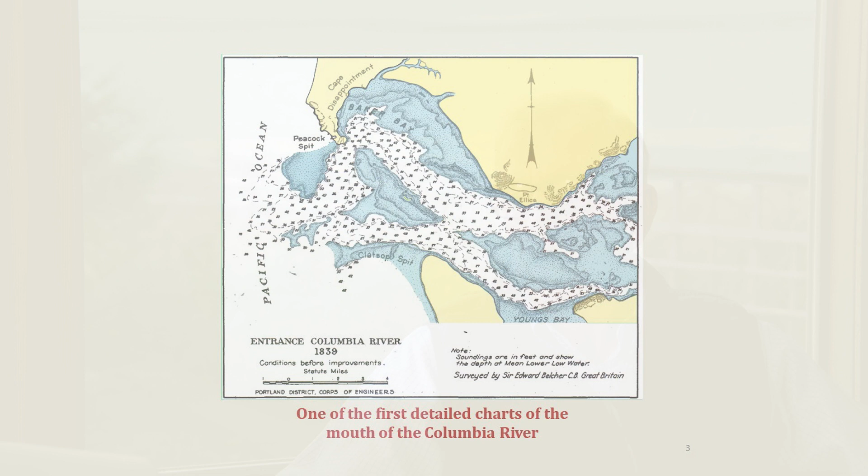The presentation is called Rails in the Surf, and it's reshaping the mouth of the Columbia River, and it's the story of a world-class engineering project. At the time of the discovery of the Columbia River, and for many, many eons before that, the mouth of the river was about 6 miles wide from what we now call Point Adams on the south to Cape Disappointment on the north. It remained that way until 1885, when the Corps of Engineers began the process of building the jetty. The first detailed charts of the mouth of the river were done in about 1840 by the Wilkes expedition.

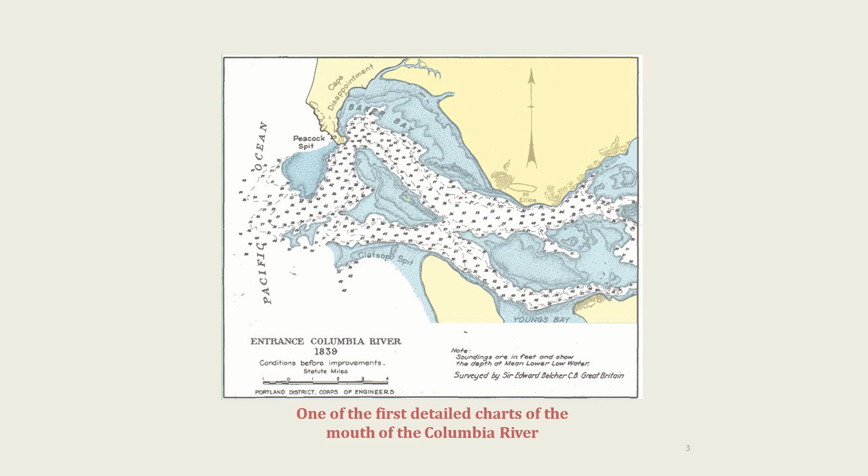And there were 2 channels in, a south channel and a north channel, and they were split by what was called the Middle Sands. So what drove the need for the jetties? Between 1850 and 1940, the population grew from less than probably 20,000 people to almost 3.5 million, and that's Washington, Oregon, and Idaho. California population added to that takes it up almost to 10 million people in that same period. There was lumbering, wheat production, farm products, and all of that was being generated here. Some consumed here, but most of it was being shipped elsewhere, primarily to California, but also to the East Coast.

So the merchants in the area began prevailing on the Corps of Engineers to improve the mouth of the river because the passage over the existing bar was very dangerous. And sometimes the ships would have to wait offshore for a couple of weeks to be able to get a break in the weather to make the passage, and outbound the same thing. They sometimes waited here for a month for good weather to be able to get the ships out safely. As the area was growing, also the production was growing inland, so the pressure was just continuing to grow.

And then in the 1930s there was a series of projects. There was the construction of the Sand Island pile dikes and the reinforcing projects of both the North and the South Jetty, which by this time had been exposed to about 20 or 30 years of hard weathering, and they needed reinforcement. And then in 1938, they started the Jetty A project, and that completed the jetty system as it exists today. And then it was primarily the maintenance of the jetties plus the maintenance of the channels at a consistent navigational depth. In addition to the jetty projects, the Corps of Engineers improved or built new defensive forts at Fort Canby on the north side of the river, Fort Stevens on the south side of the river, and then Fort Columbia also on the Washington side.

At the time the jetty was being built, the problem was that the South Channel, which came around Point Adams, [crossed a tide] flat that was exposed at low tide, and generally the prevailing winds are from the south here, and so a ship inbound would have to come in and basically make a large U-turn to get around Point Adams upriver. In the North Channel, there was a narrower channel, and you had to go around the middle sands, which were right in the middle of the river.

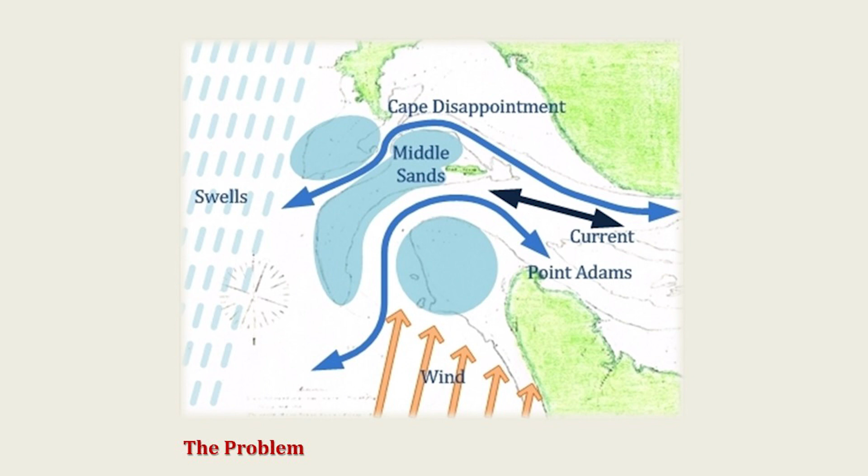Then you had the swells that were coming in from offshore, and so it just made for difficult navigation, and so a lot of ships were damaged or lost, and those that made it out often did so with loss of some freight or some damage.

So the solution was to build the jetty, and the Corps of Engineers, which was the U.S. Engineers at the time, it really preceded what is now the U.S. Corps of Engineers, looked at ways to do this, and they first thought they would construct a large pile jetty by just simply driving piles in, and they were thinking about building about 8,000 or 10,000 feet of piles along the course of the river to try to train the current to wash the solids out that were coming down from upstream.

And they concluded that trying to use a pile driver on a raft that was going up and down in the swells and the current was not a good solution, and so they chose the narrow gauge railroad, which they'd used on other projects all over the country, as the means to build this jetty. So that was the beginning.

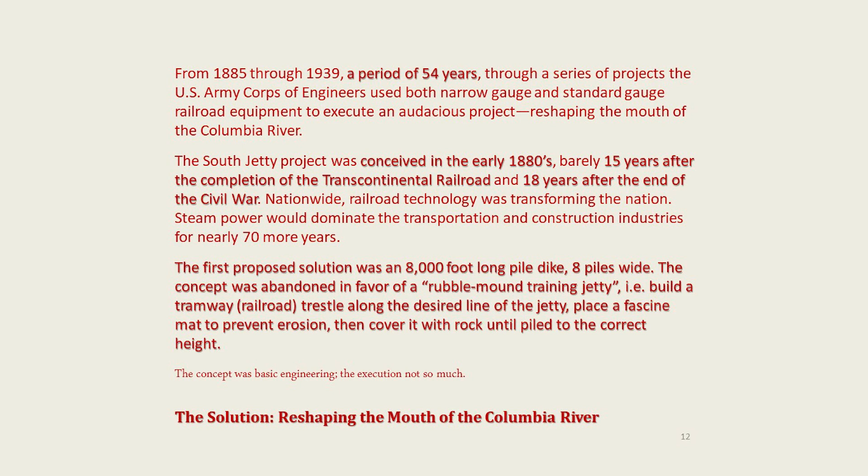Our tendency is to rely on what we can visually observe, and the jetties that we see there today are what we see. They're visual manifestations of engineering and construction that took place 120 or 130 years ago. And the part that's not visible is that the effort that was put into building the jetties was also there to shape the base of the river, which would always be below the current.

And so they were also looking at the bathymetry of the river. There's a series of maps starting in 1792 that run to about 1950 that show the changes in the river. Along with the river changes, there was also a change in the landform.

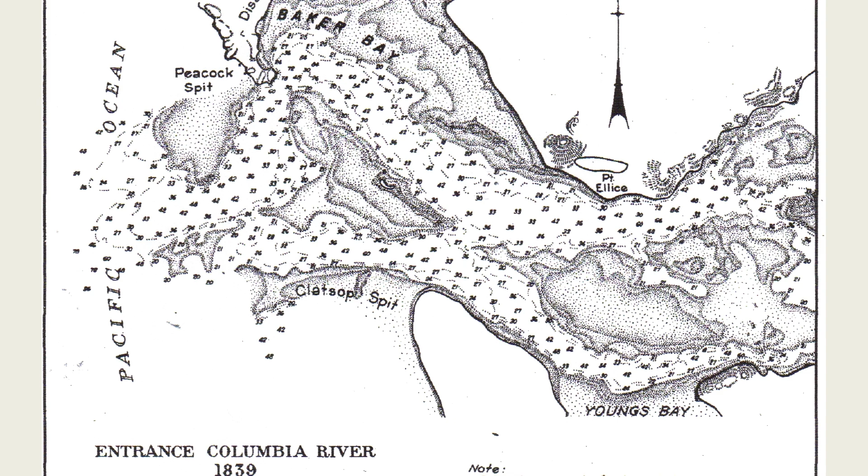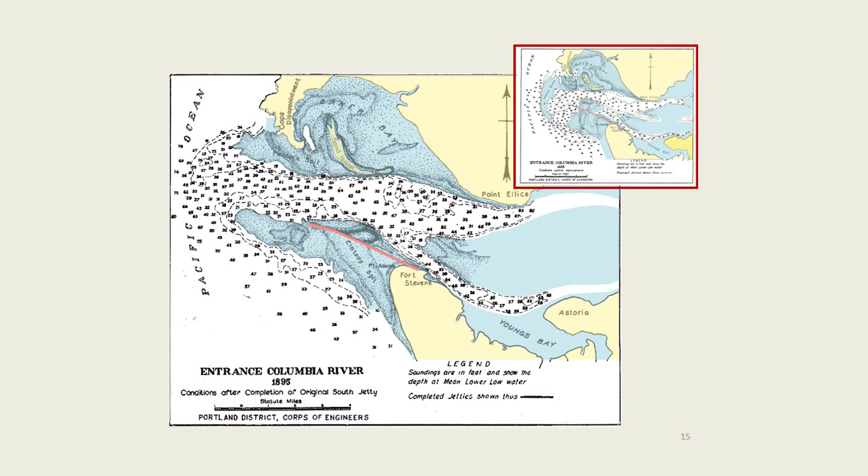And in 1885, before the construction of the dikes, we had the middle sands in the river, and we had the two channels, and Point Adams was just a round spit of land going out into the river and dying out, and you had Cape Disappointment on the north, sitting on the lava flows that were there. And once they started the construction of the jetties, by 1895, Clatsop Spit was beginning to form around the jetty, and land was accreting there.

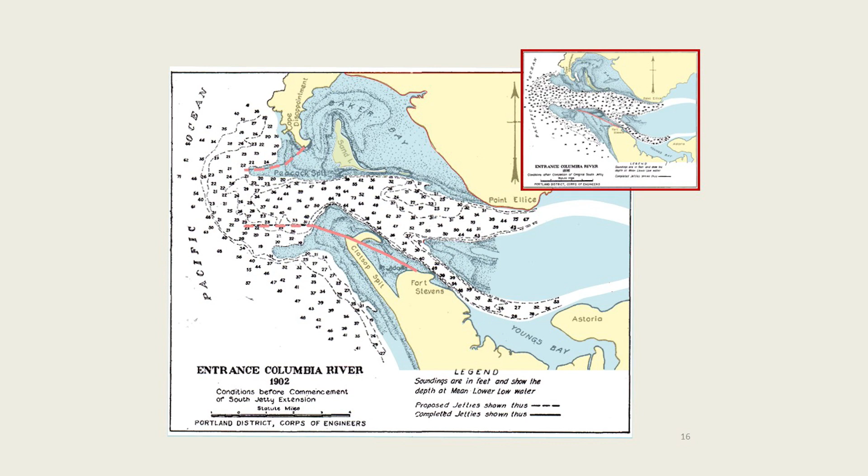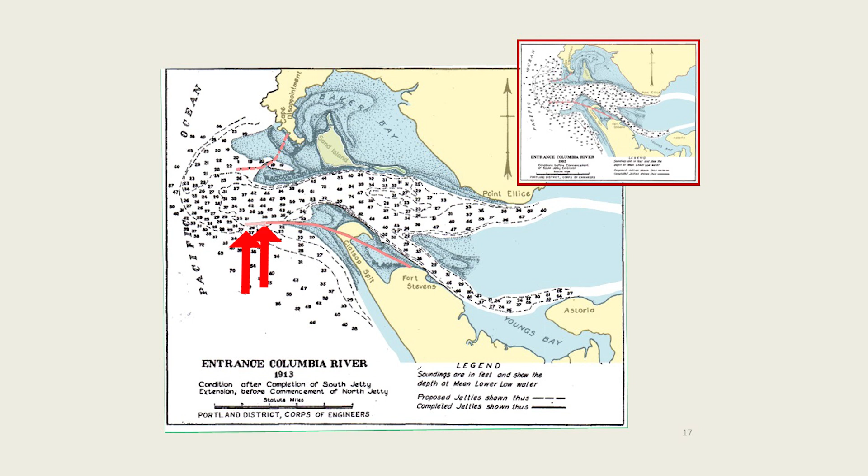By 1902, the land had accreted on the ocean side of the jetty and filled in a significant portion of that tide flat that the jetty was built on. And Clatsop Spit was emerging on the south side of the jetty. By 1913, this was well established. The jetty extended out into the river to where it currently is today, although now there's a gap between that end of the jetty and where the jetty that's being maintained ends.

Then in 1914 through 1917, the Corps constructed the North Jetty. By the time that was completed, the Benson Beach area on the north side of the North Jetty had begun to accrete and fill in, and the Long Beach Peninsula also underwent about 1,000 feet of accretion of new ground, basically because of the redefined channel and the way that distributed the water and the sediments out into the ocean. And the beach south of the South Jetty also accreted a significant amount of land.

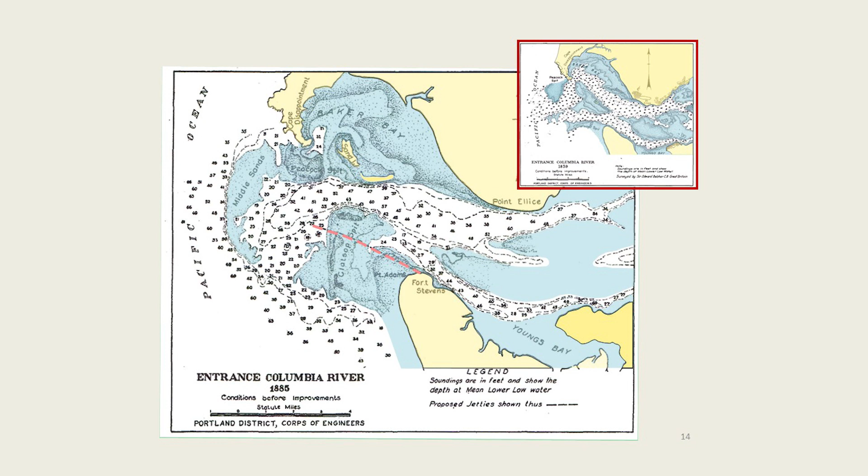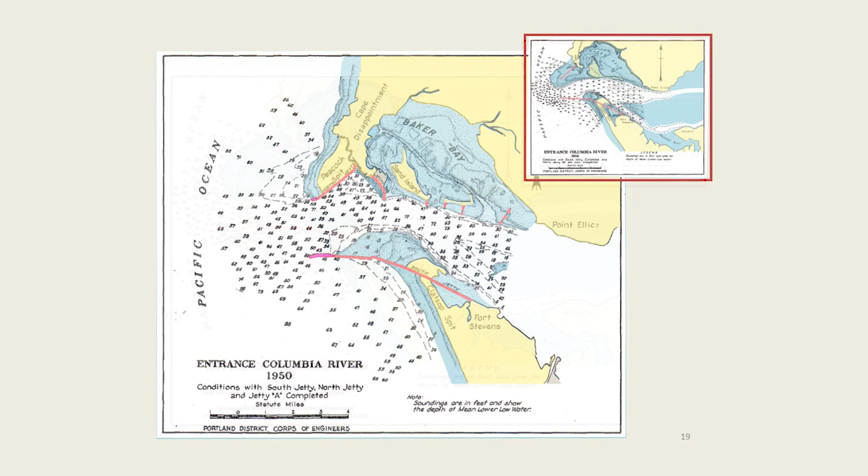And so you can see, when you look at the original 6-mile gap in the mouth of the river, it was narrowed down to 2 miles, and that's what it's maintained at today. In 1885, the outer face of the bar was approximately 3 miles west of Cape Disappointment. Construction of the jetties forced the bar further into the ocean, so that by 1900, the outer face had advanced 1 mile, and by 1950, the extreme western position of the sea face of the bar was over 5 miles west of Cape Disappointment. As the outer perimeter of the bar advances into the ocean, the original depth of water increases and the rate of advance becomes less.

And that was taken from R.E. Hickson and F.W. Rodolf's History of the Columbia River Jetties, and those two gentlemen were engineers with the Corps of Engineers in the 1930s. So how did they do it? The Corps of Engineers built a model that shows us how they did it.

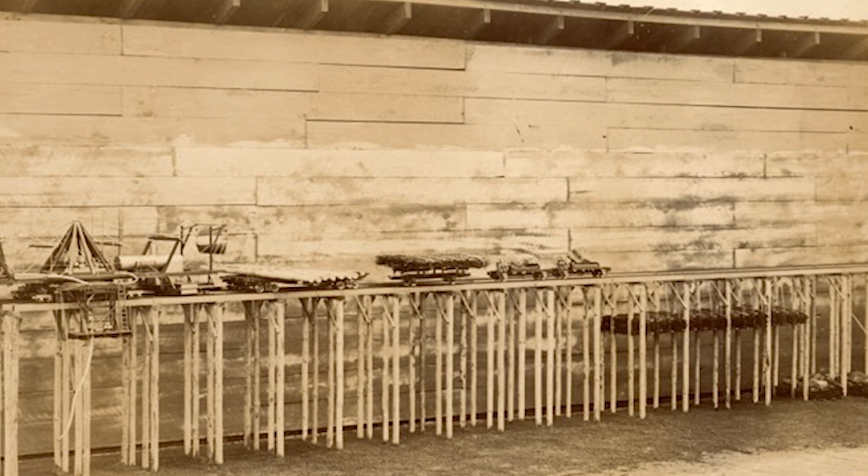This image shows the trestle being built out into the water, and this trestle had on top two parallel sets of rails that were 13 feet center to center. On those rails, they had a giant pile driver that was mounted on four flat cars, and then they brought trains with logs for more pilings, beams for constructing the pile bents, and building the base for the rails on top of these bents. And so this structure was advanced out into the water 16 feet at a time. Each bent was 16 feet out from the last one.

And then they slowly filled in with stone between them. But before the stone went down, they laid fascines, and a fascine is a round structure. The ones they used here were about 18 inches to 2 feet in diameter and about 16 feet long, and those were lowered in place and laid on the ocean floor, and then they laid the rocks on top of those. And the purpose that served was to prevent the sand at the base from eroding away below the rocks.

And the willow material, because it was underwater most of the time, would not rot, would stay in the bundles that it was bound into and provide that support for the rock on a continuing basis. The fascine was also used back in Napoleonic times for building battle structures and reinforcing trenches and that kind of thing. And it's just been a long-term use by the military.

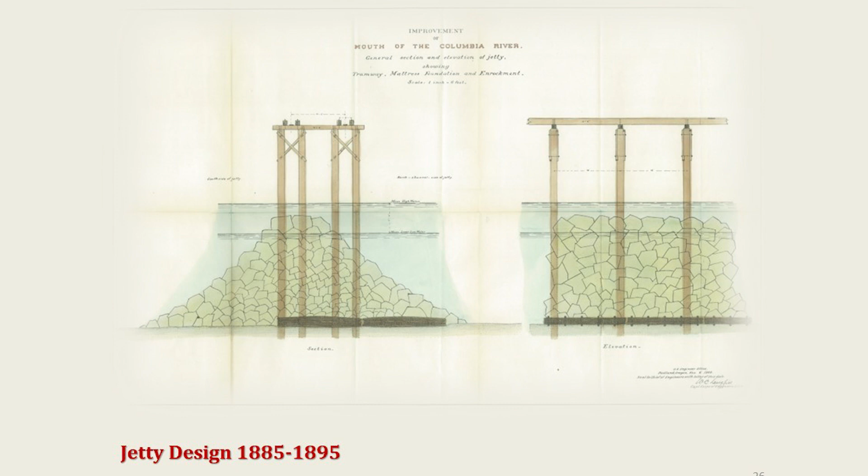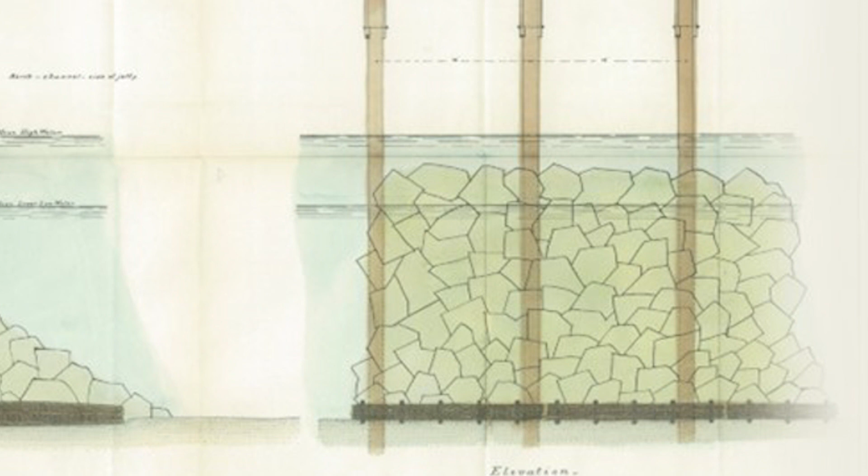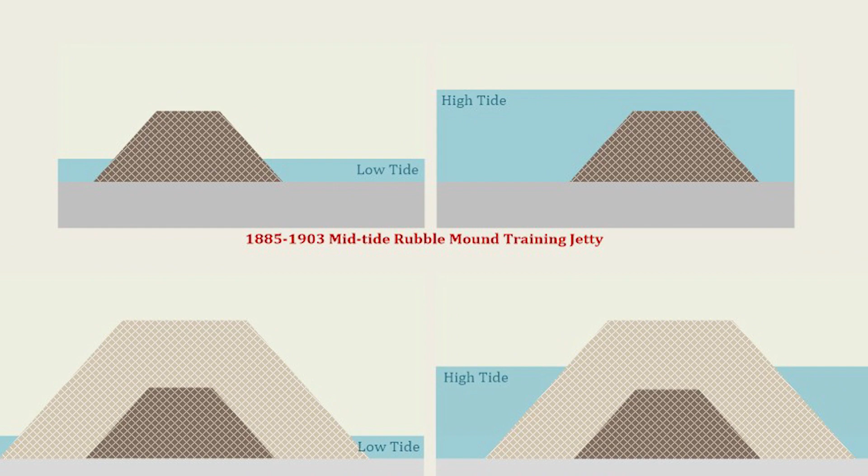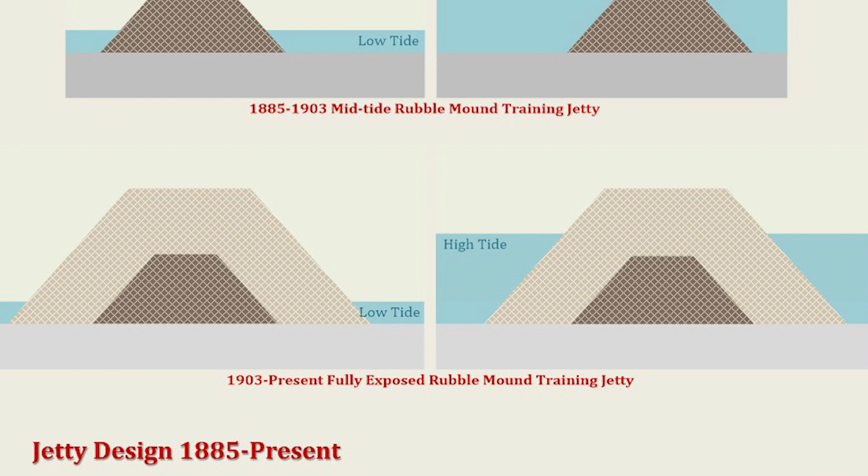As I mentioned before, the first phase of the jetty construction was a mid-tide jetty, where at low tide the top of the jetty was exposed, and at high tide it was underwater. And then after they observed the performance of the first jetty and decided to make it a fully exposed rubble mound training jetty, that's what they constructed in the second phase. And it took considerably more material than the first phase,

because they couldn't drive piles through stones that were already in place, so they constructed a new set of trestles immediately adjacent to the mid-tide jetty, and then poured stone over that and covered it up, and then filled it to the outside, and so you now had a wider structure that would support a higher top that would always be out of the water.

The Corps decided to use the narrow gauge railroad equipment that they'd used elsewhere. It was readily available, it had sufficient power to perform the tasks, and it was proportionally smaller and lighter than the standard gauge locomotives and cars that were also in use at the time. And so the equipment that was required for the construction of the jetties included locomotives, pile drivers, flat cars, dump cars, cranes, and tugs and barges.

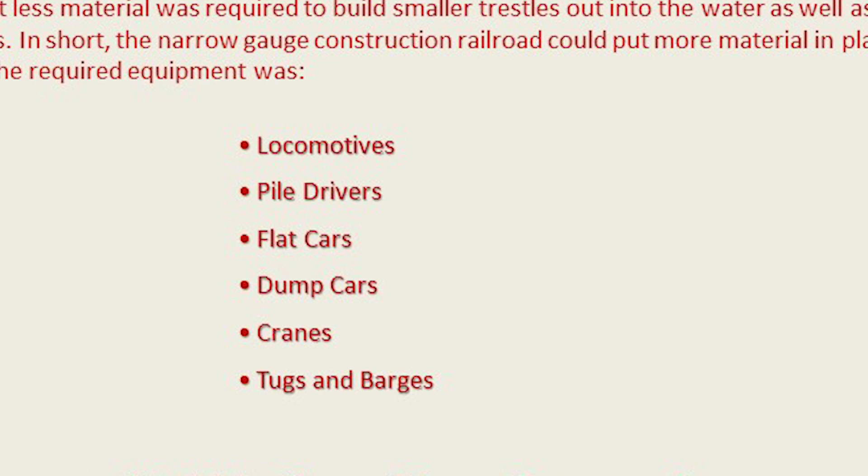They had to build a supply chain to provide piles and lumber and fascines and hardware, ties, rail, tools, stone, and fuel. And so it just grew and grew. They had to build receiving facilities for the tugs to barge down the rocks. Needed a service yard and a marshaling yard for the railroad. And they had the trestle itself with all its bents that were pushed out into the water.

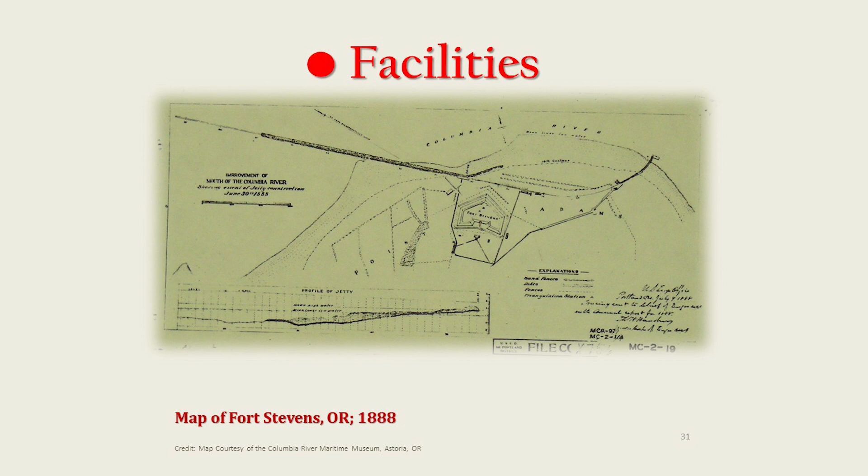So the construction of the South Jetty occurred between 1885 and 1913, which is a 27, 28-year period. And the first phase was done 1885 to 1895, with an 8-year break, and then from 1903 to 1913. And the facilities that were built at Fort Stevens to support the construction of the jetty included a wharf that was built out into the river at the time, the marshaling yards, the jetty itself.

At the beginning, the standard gauge railroad was still not serving Astoria, and it was not extended out here. But by about 1902 or 1903, the standard gauge railroad had been extended and also began to bring some of the supplies. This is a map of Fort Stevens in 1888. It shows the wharfing facilities and the structures that supported the jetty.

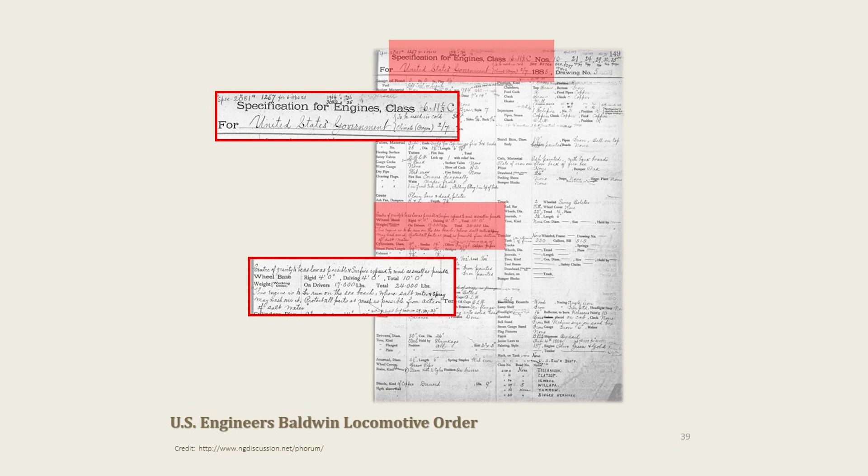This is a photo of the Corps of Engineers order to Baldwin Locomotive Works for 6 locomotives. They had a number of different names for these. They named them after local areas like Clatsop and Tillamook, Willapa, and several other places. The detail on the order shows that these locomotives were to be operated in a harsh area. It says that effort is to be made to protect all of the metal on the locomotives with proper coatings.

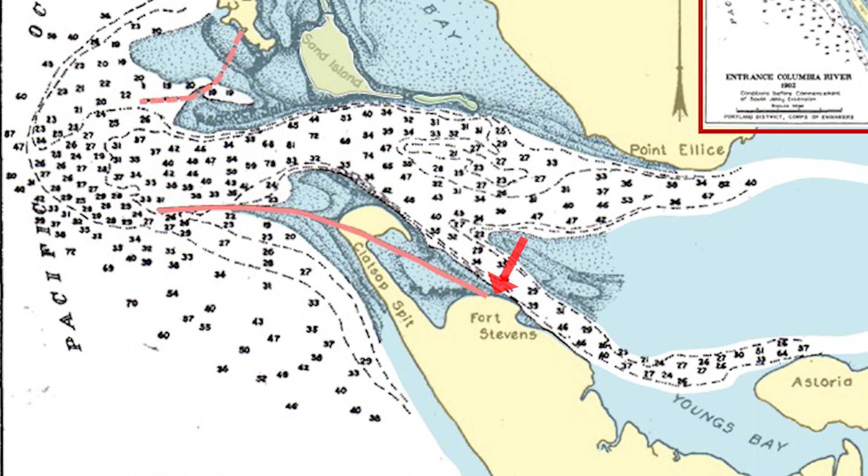Another ship crossing the bar saw the wreck and sent a wireless message to the U.S. Life-Saving Service at Point Adams. And one of the men from the life-saving station hurried to the jetty construction office. As luck would have it, locomotive number 4 had been fired up for yard work and was ready to go. And 4 men took the locomotive out on the jetty trestle. The strong winds and huge seas made for poor visibility and treacherous progress.

They soon encountered the first mate of the Admiral clutching a small boy under his coat. It was the son of Captain Bender, the skipper of the Admiral. And further down the trestle, 3 more survivors were sighted: Captain and Mrs. Bender and the ship's cook. And they were quickly taken into the warm cabin of the locomotive. The Admiral had passed all the way through the jetty trestle, and the remaining survivors were on the far side of the 200-foot breach in the jetty.

The locomotive returned to the yard and picked up 2 flat cars, which were pushed ahead of the locomotive, and the lead car had a Lyle life-saving gun mounted on the deck of the flat car. A Lyle gun is a small cannon that fired a rescue line over long distances. And the crew of the life-saving service returned and got the line over to the survivors, and one by one rescued all of the remaining 7 people.

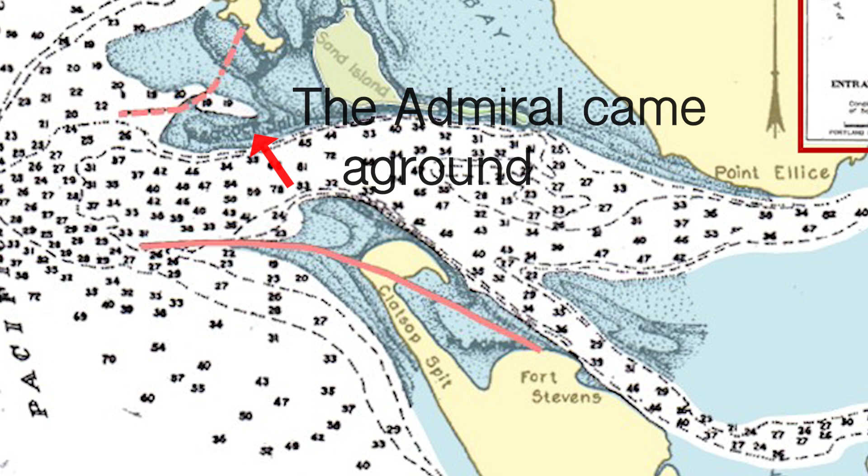The Admiral had been washed through the breach and washed up on Peacock Spit to the north, and a salvage attempt was thwarted by heavy seas, and the ship became a total loss. And this was the only time in history where a locomotive went to sea to come to the aid of a ship in distress.

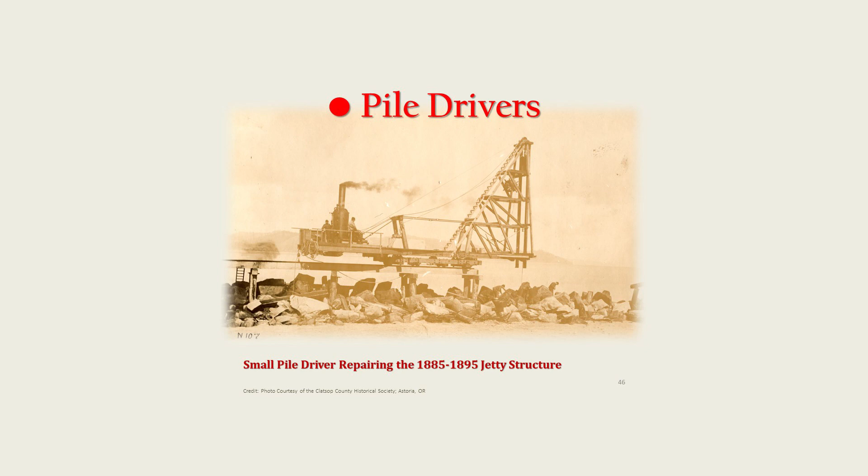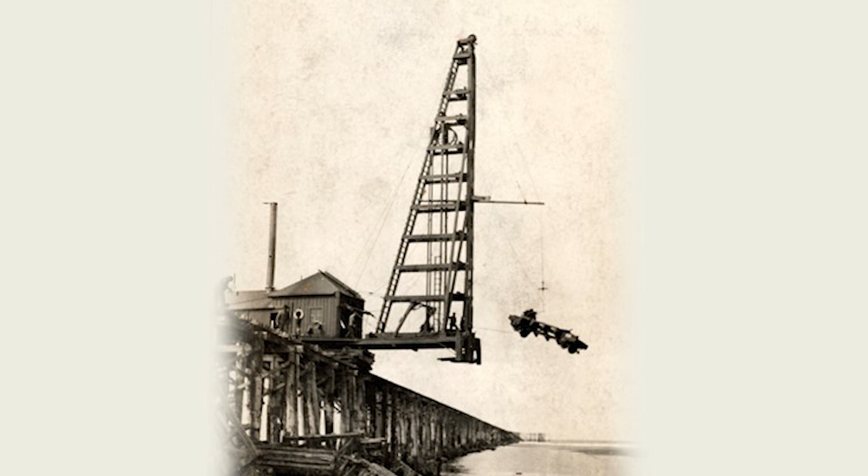Here we see the large pile driver lifting a dump car that fell off of the jetty, recovering it, bringing it back up on the tracks. I would think probably a couple of times a year they lost some cars that they had to recover.

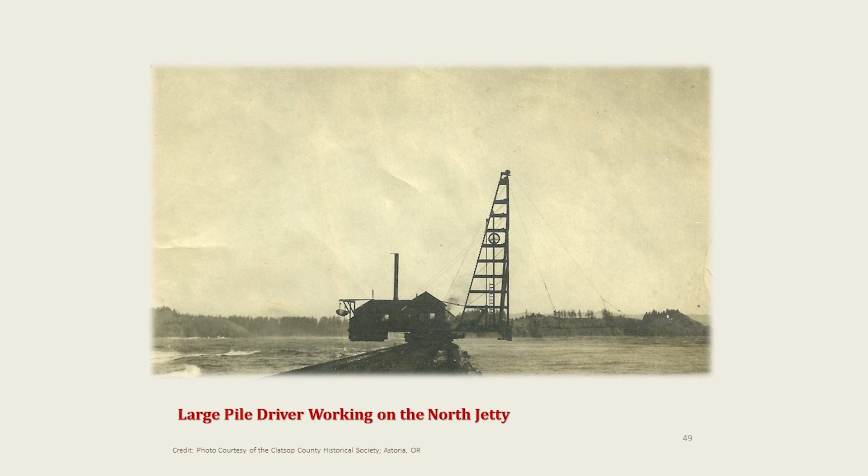This photo is taken on the North Jetty and shows the pile driver at work, and on the backside of the pile driver is a house with a boiler in it, a giant counterweight to offset the weight of the pile driving structure, and a lifeboat hanging on the back of the house. Again, flat cars were used for dumping rubble stone and carrying logs for the pilings that were driven.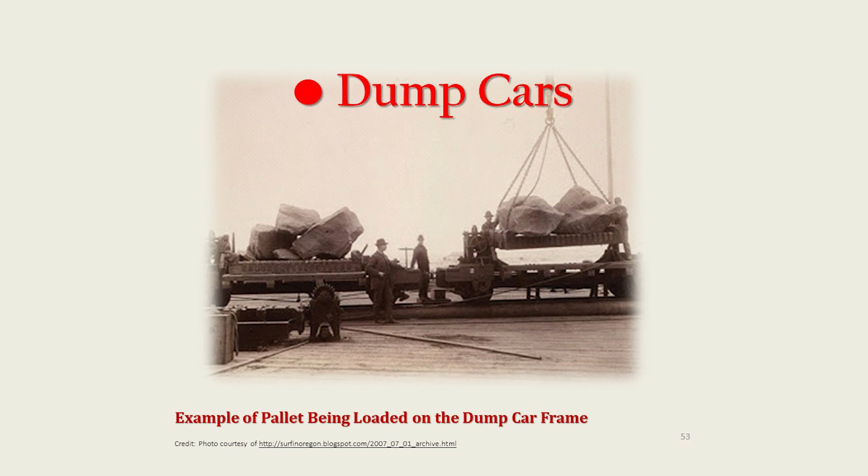Then there were the dump cars. This became a very useful car in the process, and it was designed by a young draftsman who was working on the South Jetty. You can see that the car has a set of wheels on each end and has a framework with a pallet between it and a wheel on one end, a hand wheel.

And so you would load the rock onto the dump car, and then when you got out, you'd turn the wheel, and it would slowly tilt the floor of the car up, and the understructure of the car would rest on the railroad ties, and that would stop the car from turning over, and then the rock would slide off and be incorporated into the jetty.

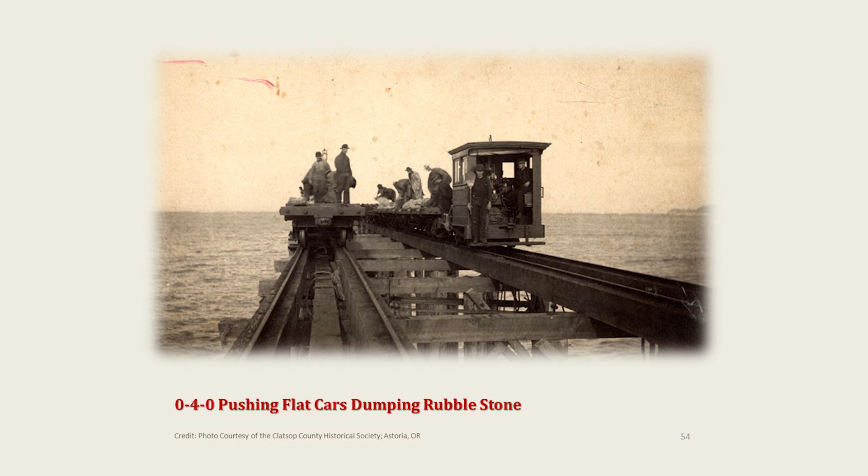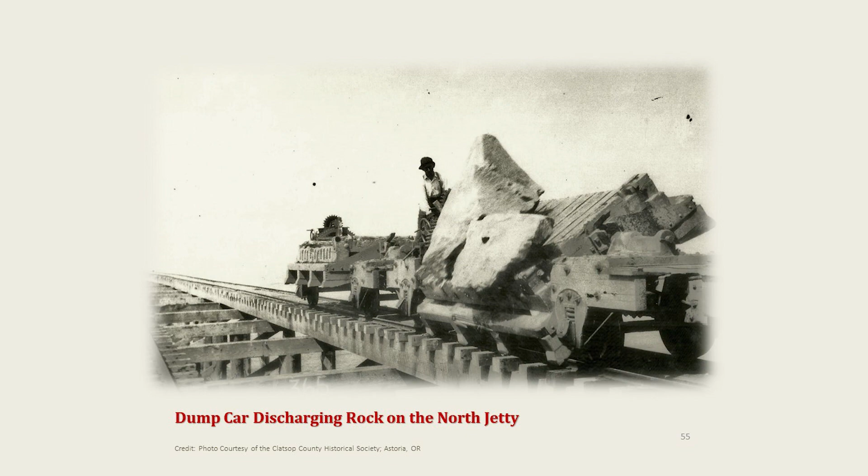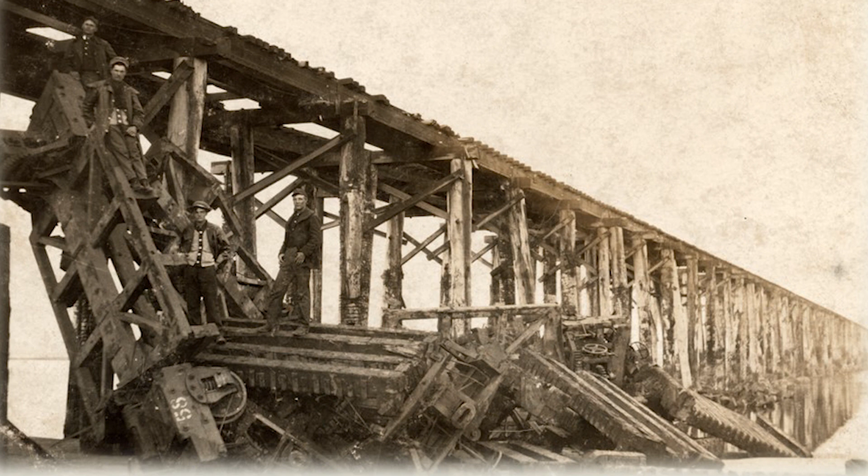Again, here's another photograph of a number of cars that came off of the trestle and landed on the ocean floor. They were recovered and probably rebuilt and/or used for parts in other cars.

The reason for building these was the base of the North Jetty was slowly eroding. They were trying to prevent that, and so they built 4 pile dikes, all on the Washington side, and the water would back up behind them and then flow out around the ends and slowly create a kind of a cross current into the middle of the main channel.

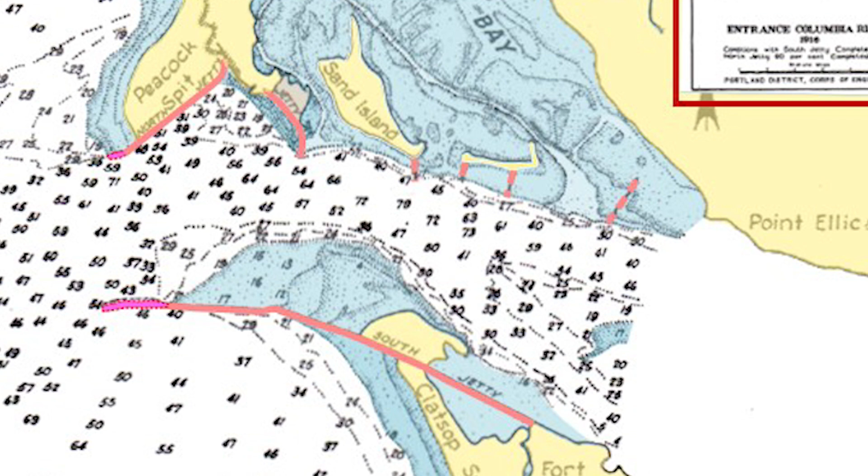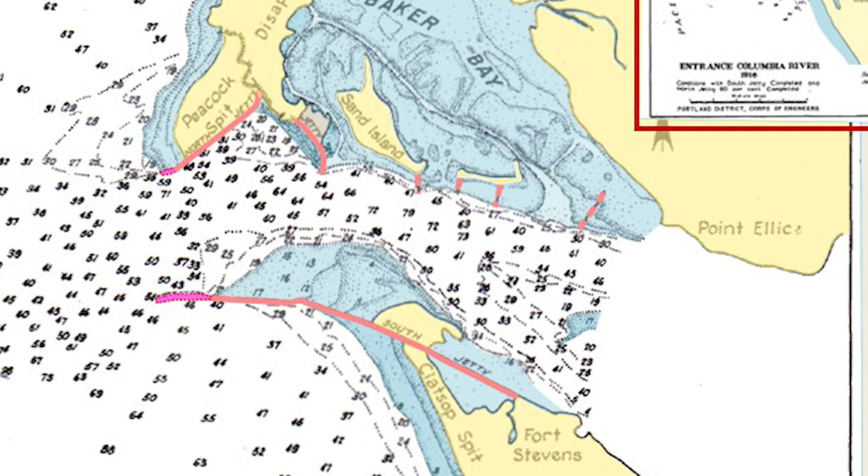They constructed them and observed them for several years and decided they weren't doing what they thought they would do. And so they constructed the A jetty, which is perpendicular to the channel of the river, and it accomplished what they wanted to do, which was to prevent the erosion of the base of the North Jetty.

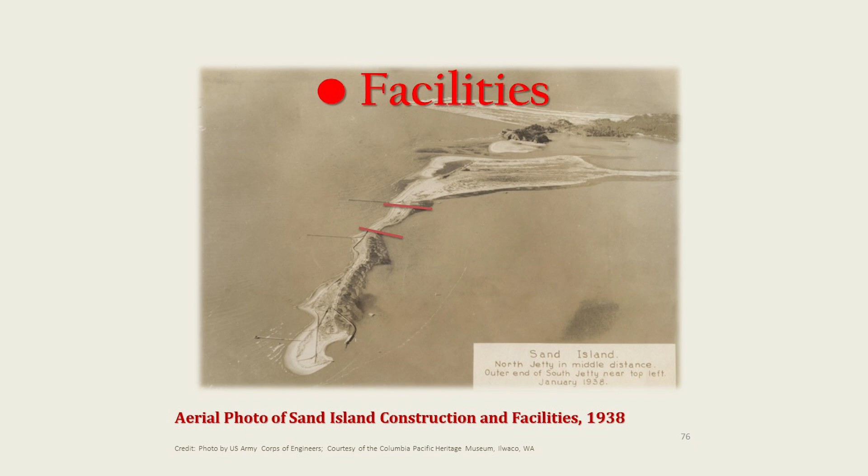This is a photograph of the facilities of the Sand Island pile dikes. On the north side of Sand Island, there's a receiving dock, and then they constructed a narrow gauge railroad, and that went out, and they had smaller pile drivers, and they would build these out into the river, and the pile driver would advance. Once they had driven more pilings, they would set timbers and railings on top and advance the course of construction that way.

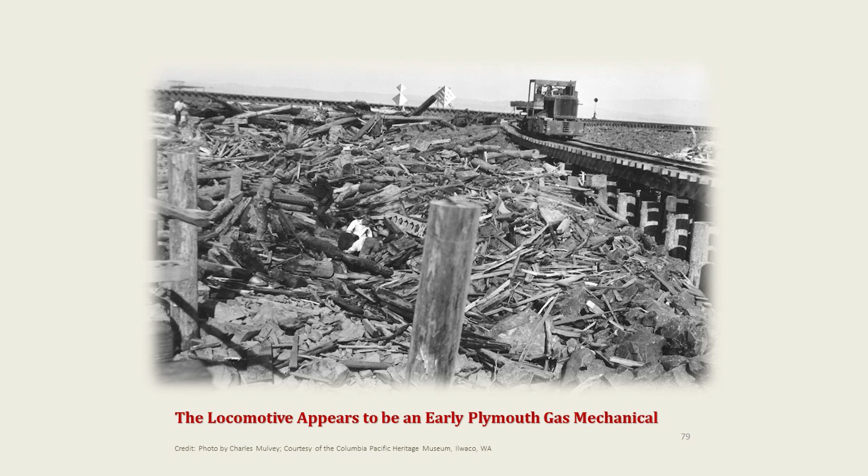There were 2 small locomotives involved in the building of the pile dikes. This is the 0-4-0 tanker, which is no pilot wheels, 4 driving wheels, and no trailing wheels. It's pulling a series of 4 cubic yard dump cars. This is the early Plymouth gas mechanical locomotive that was also used in the construction. The dump cars were built by a company up in the Puget Sound area and basically handled smaller rock, more basketball sized.

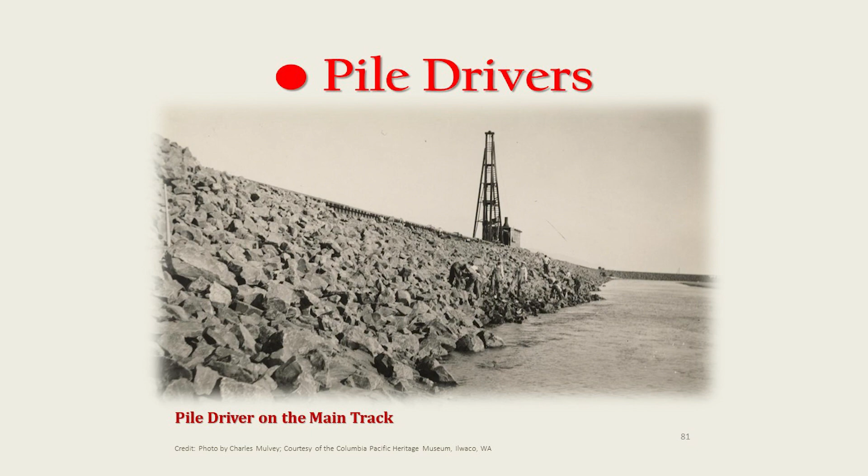Here's a photograph of the pile driver out on the pile dike as the pile dike is advancing into the water. Another one of the pile driver advancing the pile.

So from 1931 to 1936, major repairs were made on the South Jetty, including the pouring of the massive concrete jetty cap. And I should point out that that was done with standard gauge railroad. They again built another set of pile bents and poured that. From 1938 to 1940, they worked on the maintenance of the North Jetty, also pouring a large pile cap out there. This was done in concert with the construction of the A jetty and was also done with standard gauge locomotives.

By the eve of World War II, the jetties and pile dikes had decisively reshaped the mouth of the river. It had been narrowed from 6 2/3 miles to 2 miles, and a maintained channel depth increased from about 20 feet to more than 40 feet.

By this time, nearly 50,000 piles had been driven, probably 140,000 fascines had been fabricated and placed. 12,360,000 tons of rock had been quarried, transloaded, and placed. 20 million board feet of lumber had been used, and there were most likely about 185,000 train operations during the course of this period. And that's the story of the South Jetty.

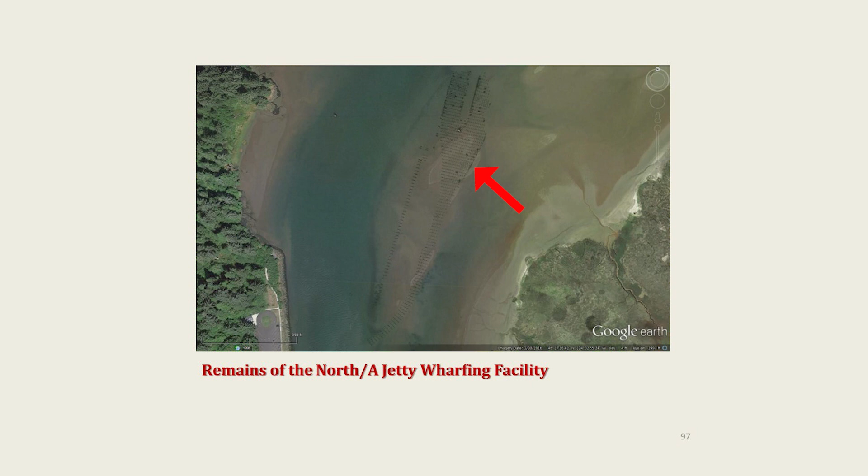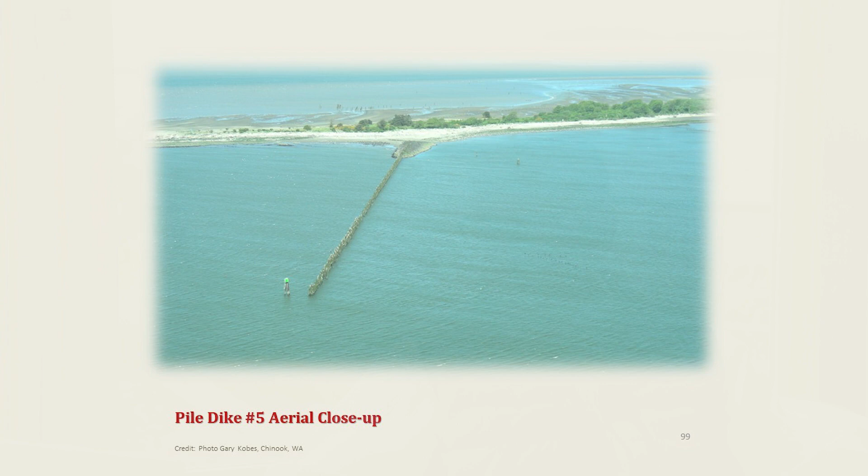Here's a view of Sand Island today with pile dikes 1, 3, and 5, A jetty and North jetty in the background. A photo of the remains of the North and A jetty wharfing facility. Remains of the jetty A trestles extending out past the Coast Guard base. This is pile dike 5, shown in an aerial close-up. That's the end.